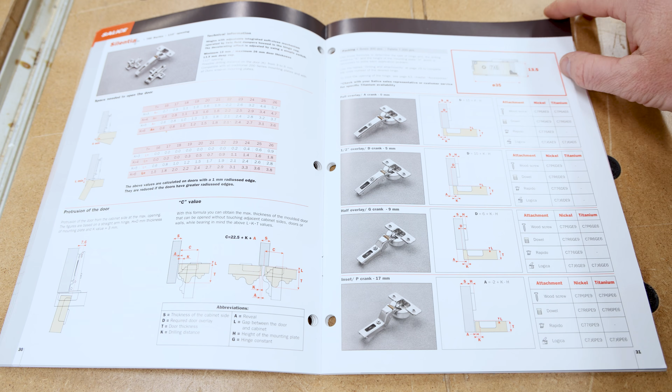Choosing the right cabinet hinges for your project should not be complicated. However, due to manuals and the endless amount of options out there, it makes it very confusing. Selecting the right hardware for your cabinetry project will make your project go incredibly smooth. Today, I'm going to provide a simple step-by-step breakdown that removes all of that confusion.

If you were to ask me, I would say that the simplest project for a woodworker and the most basic project that you can make is a cabinet. It is literally a box that usually has a box inside of it and has some sort of rectangular shaped flat panel that acts as either a door covering that box or a drawer front covering the box, which is your drawer. So when you really think about it, it's a very simple task. I have seen some amazing woodworkers who, if you were to ask them to build a cabinet, they would struggle, they would get very frustrated, and they would think that it's way more complicated than it really is.

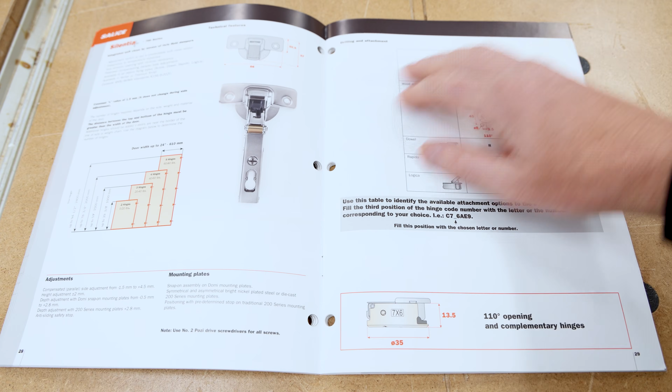The problem is not the project, the problem is the hardware. Now, when you open up one of the manuals from any of the leading manufacturers, it can be incredibly overwhelming and incredibly confusing. But here's what I'm going to tell you about those catalogs. 80% of the stuff in those catalogs is for very specific applications that most people, especially beginners, are never going to need. The other 20% is exactly what you need and is exactly what's going to get you through your project. From there, you just have to figure out what of that 20% you actually need.

Let's start by talking about the three different styles of cabinets. We have face frame, we have frameless, and we have inset. What you can see here, this is a frameless inset application. This is a face frame inset application. This is a face frame overlay, frameless overlay, face frame overlay, face frame overlay, face frame overlay, and frameless overlay.

Overlay refers to how much the door protrudes over the internal edge of the face frame. Frameless overlay refers to how much the door protrudes over the wall of the cabinet. So in this case, this is the side wall, this is the door. The overlay is the distance from the inside edge of that cabinet to the outside edge of the door. Then when we take an example like inset, in this case being face frame inset, it means that the door is in perfect alignment with either the face frame or, in this case, side-by-side cabinets being frameless.

This is frameless inset. The type of cabinet that you're building 100% dictates the type of hinge that you need to use for your project.

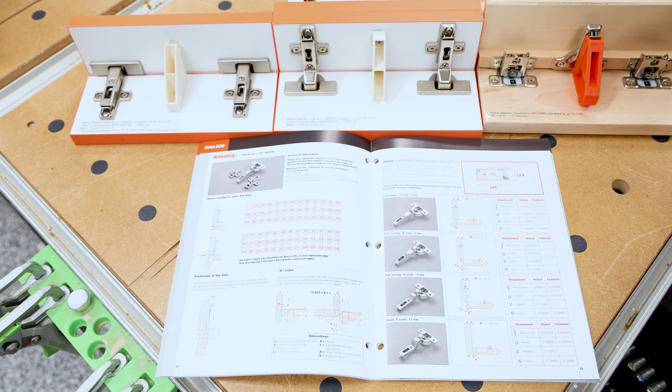Finally, there are various types of hinges, whether it's push to open, clip-on, compact, etc. To give you examples, this is just a standard straight arm hinge, very commonly used. This would be the hinge you want to use in a full overlay frameless cabinet. The next one is used for a frameless inset, and you'll notice it's very different here. It is not a perfectly straight arm like this one - this is commonly referred to as cranked, and they have various different styles for different applications. This would typically be the type of hinge you'd use for this application.

And then finally over here we have a more compact version of the hinges. They still operate very similar, they still adjust very similar - it's just a much smaller hinge itself. And there are different versions of this hinge to accommodate for different overlays.

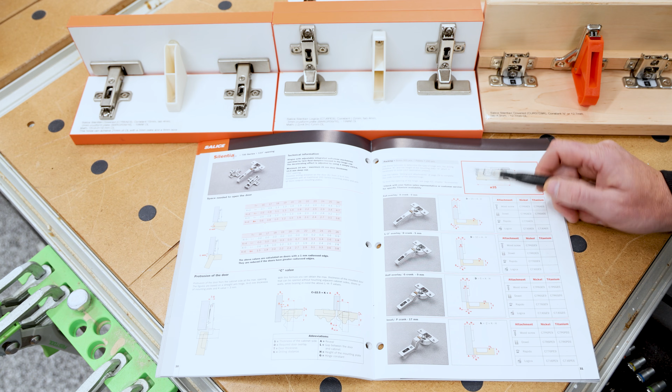Since I showed you those, I can show you in the manual - it doesn't have to be incredibly confusing, it can actually be incredibly helpful as well. So to give you a better visual, we have our full overlay straight arm hinge. You can see right here what kind of overlay it's going to give me. Now we have all these letters, which if you go back to the abbreviations, you can figure out what they all mean. I'll talk more about that in just a moment.

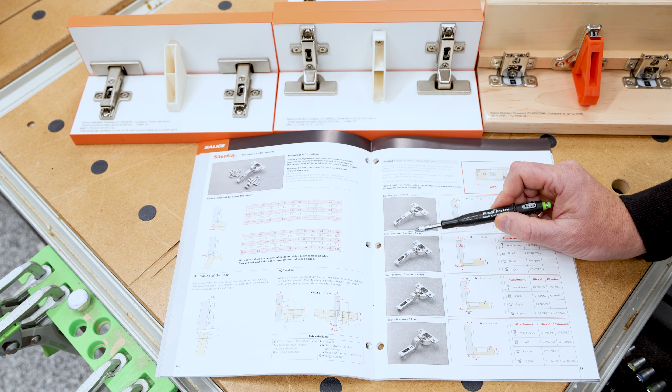Then we get into our different overlays - 1/2 inch overlay, half overlay, and inset. You can tell that the angle on that hinge gets more aggressive with each one, and you can look down here in the pictures to see exactly what kind of overlay it's going to provide.

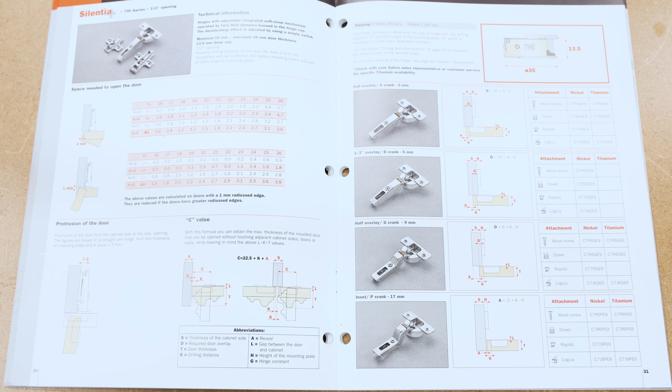Since we're already looking at the manual, I figured this would be a really good opportunity to help you understand these manuals better. When I first looked at these, it was incredibly confusing because there are so many letters and numbers I didn't understand. But if you understand what the letters, values, numbers, and everything mean, using a manual is the absolute surefire way to select the proper equipment.

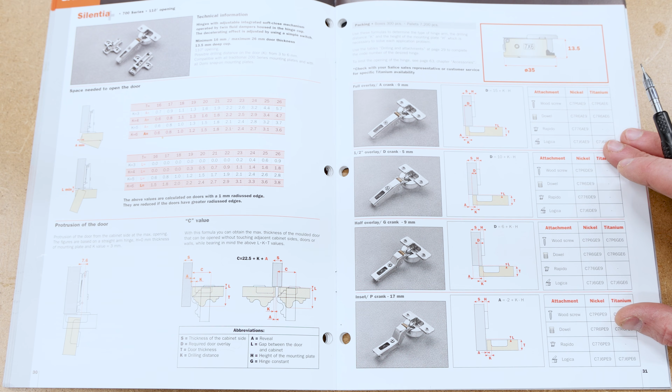Now, not every company has an incredibly easy manual to follow. This one right here is for the Salice hinges, pretty much everything I've been showing you in this video. If you look down here, it has the abbreviations - S, thickness of the side of the cabinet.

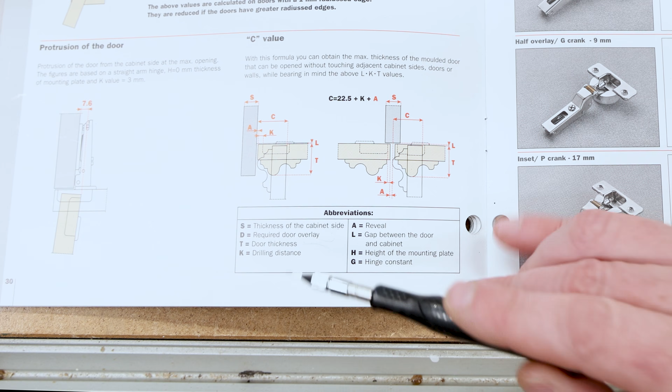D, required door overlay. T, door thickness. K, drilling distance, that's the tab we talked about. I said before how the door thickness can have an effect on what hinges you use. A, the reveal, we talked about that.

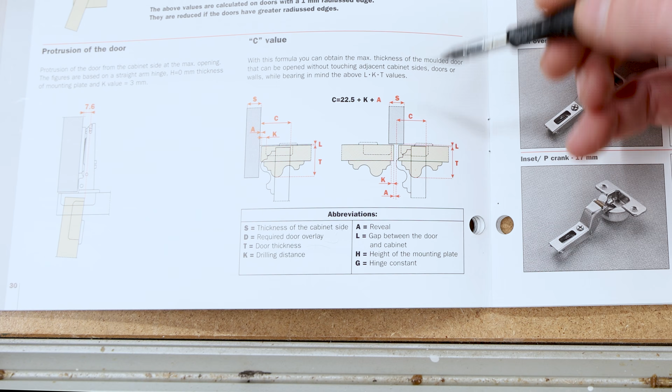L, the gap between the door and the cabinet. We didn't discuss that. That is how far the door sits from the cabinet side, not how far it protrudes, but how far away it sits. With these hinges and other manufacturers, you can actually adjust in and out where you need those to go, but you'll be able to find out what those measurements are.

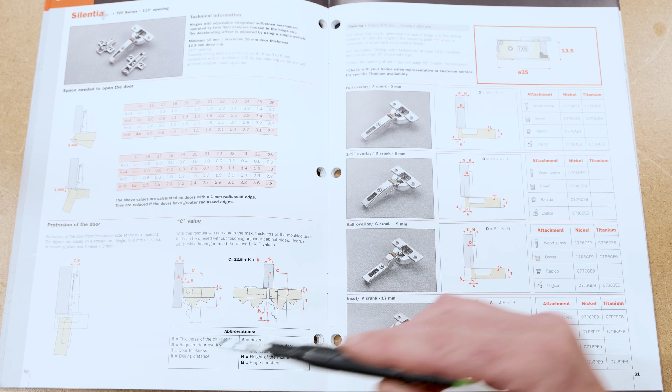H, height of the mounting plate, like we discussed. G is the hinge constant. Now let me show you in the manual some of these equations. This could get a little bit confusing, but you just need to understand what each one of these things mean. So before I referred to everything as overlay, and I said OL.

If you go into the manual here, it says D, required door overlay. So if I know that I want to have a 17 millimeter overlay on a frameless cabinet, I know this number would be 17. Okay, this is my constant. That's the only number it provides for me. So in this manual from Salice, they provide you the constants for their hinges.

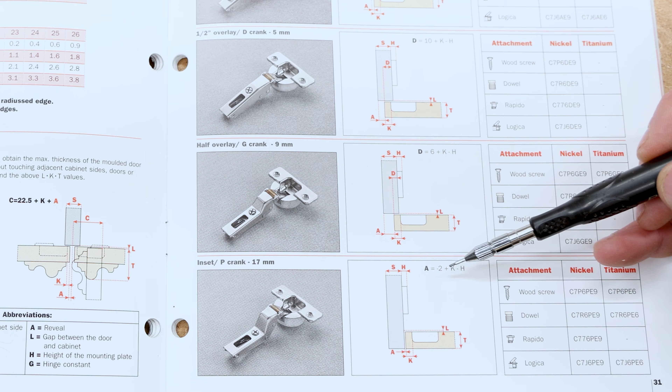This one has a 10. This one has a 6. This one is a -2. The reason why these are different is because they are different hinges for different applications. So all you need to do is look in the manual and find that. If you're using this hinge, you know it's a 15.

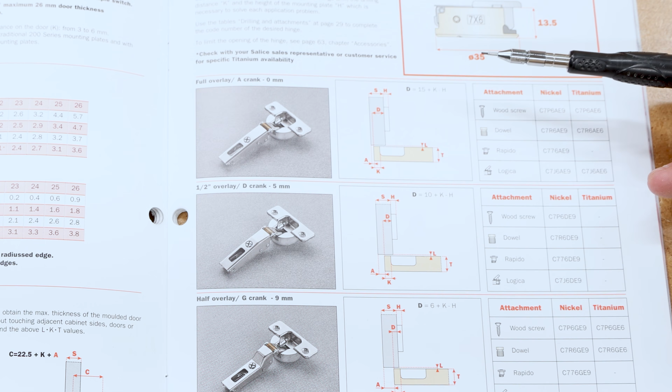We're going to add the tab, in this case K, the drilling distance. And we're going to subtract the H, which again is the plate height. So it is in the manual right here for you to determine what you need to know. Then you can come over here and look at some other charts along with various other ones throughout the manual.

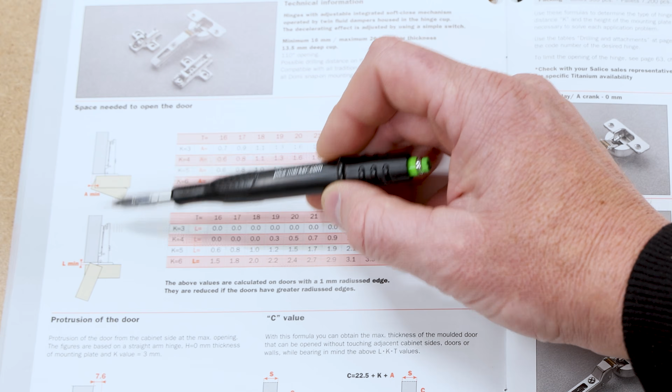This is a space needed to open door. What that's referring to is the space needed, not only from the end of the door to the side of the cabinet, because there might be another cabinet door there, but also from the back side of the door to the front side of the cabinet.

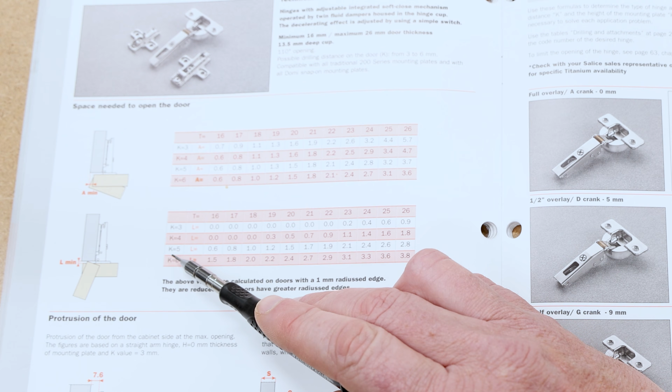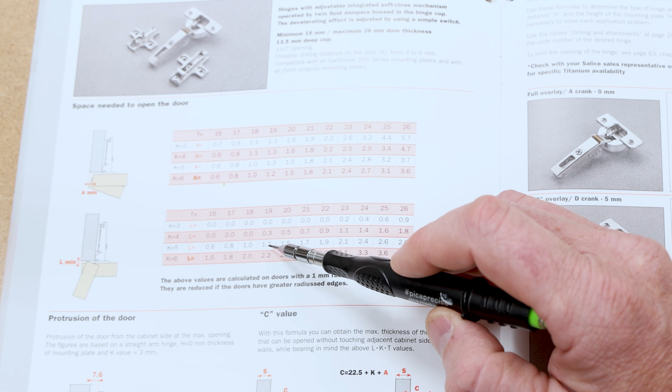And what this is saying is T equals door thickness, K is the tab. If I did a tab of 5 millimeters, and I had a door thickness of 19, come down here, I need 1.2 millimeters of space at a minimum. So that's all this chart is telling you. All the information you need is in there, you just have to understand what each one of the values means.

Once you identify the type of cabinet that you're going to build and you understand that simple formula, this whole process becomes a lot easier. Now, all the major companies within the cabinet hardware industry, they all provide all of their manuals online for you to look at. I encourage all of you to go there and become familiar with it. The more familiar you are with the manual, the easier this process will become.